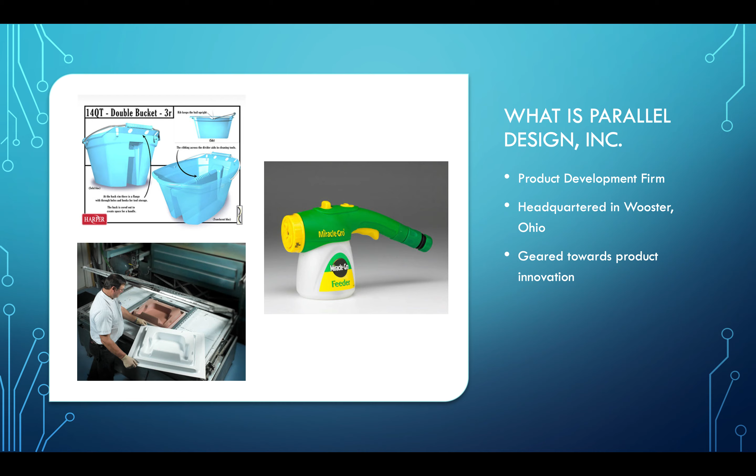On Parallel's website, they list all the different services they provide. The first one that comes up is website programming. They program for many different things that a company's website could need, as well as application-based code, such as programming for machines that do certain tasks, such as packaging the pills that a hospital would use.

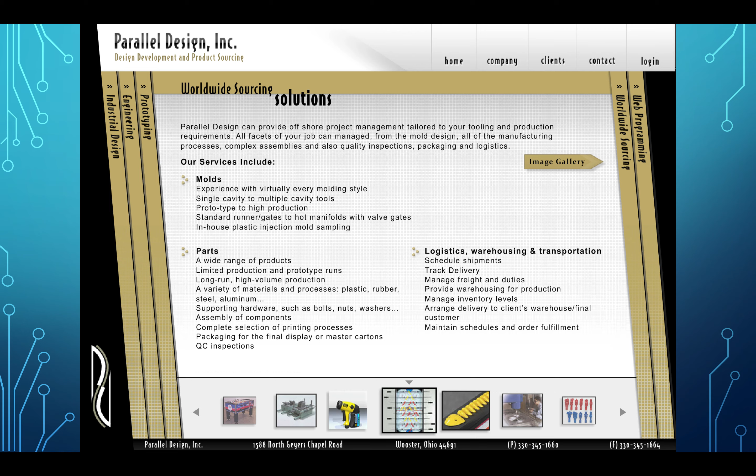The next service they offer is logistics planning of delivering and making products, as well as multiple solutions for sourcing them. Another is the prototyping of products. This is kind of what I dealt with, as some prototypes are made out of plastic and have to be screwed together, but I'll get into that later. They offer designing and prototyping of any new products a company wants to make.

The second to last service on their website is the engineering of products. A company would need this once they have a product they want to produce, but need to refine it for mass production. This is the area where my practicum fell the most. They analyze products to figure out what could go wrong with them and how to fix those issues.

The last service they offer is innovative industrial design. They look at products and how a company wants to change them to figure out how they can make those changes. This helps companies address what the product needs to do or change things that don't work.

So what was my practicum? I looked at the joints where screws are put into plastic products. This requires a boss, which is a piece of the product where there is more plastic for the screw to thread into, and it makes it harder to break the piece off. But even with the more reinforced plastic, the piece can still break, which is what I looked at specifically.

The two ways the piece can break are either by pulling the screw out of the plastic and breaking all the threads in it, or breaking the boss off entirely, screw and all. Knowing the forces where the two types of compromises happen is how the designers figure out how small the boss can be. It all depends on the outer diameter of the boss.

The more plastic that's there, the stronger it'll be. So as the size of the boss increases, it becomes less likely that the entire boss will break and more likely that the force will pull the screw out.

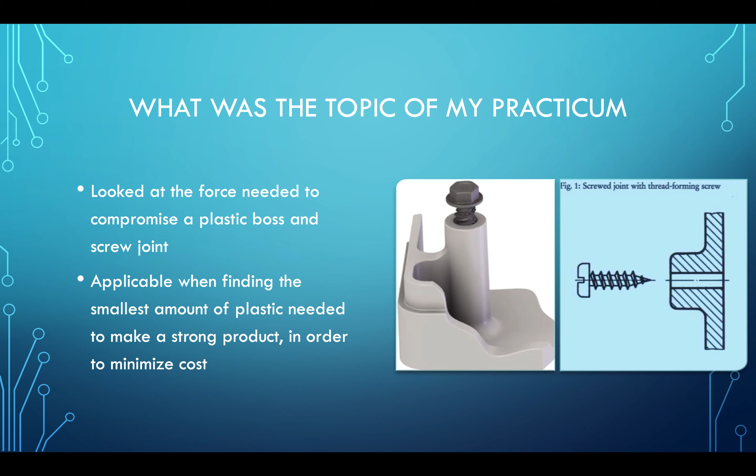To start out the practicum, my supervisor gave me a packet with general information about screw joints and how they can break. This had everything from thread-forming screws to sheet metal screws to application problems and how to find the forces that'll break them. This gave me a lot of information, but I still had to do a good amount of other research on the forces that break plastic products and everything involved.

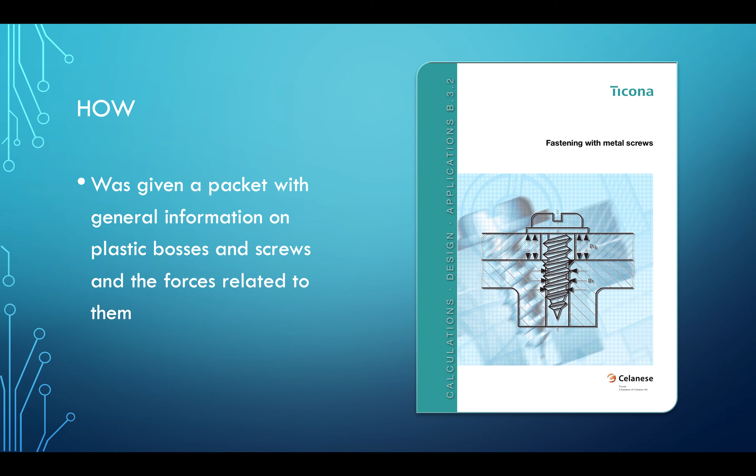Once I figured out what the information in the packet was actually saying and understood the concepts, I was able to look more closely at the other parts of the packet that actually had the information I needed for what I was doing. The first part of the packet that applied to the specific situation I was looking at was this table and diagram. The packet overall had a lot of recommendations for how to go about making plastic screw bosses and the dimensions of everything involved.

For the thread-forming screws I was looking at, they recommended that the diameter of the screw receiving hole in the boss be 80% of the diameter of the screw, including the threads. This makes it so the screw has enough plastic to bite into, but so that there is also enough room for the screw to go in without cracking the plastic anywhere. This gave me the inner boss diameter based on the screw size, as it should be 80%.

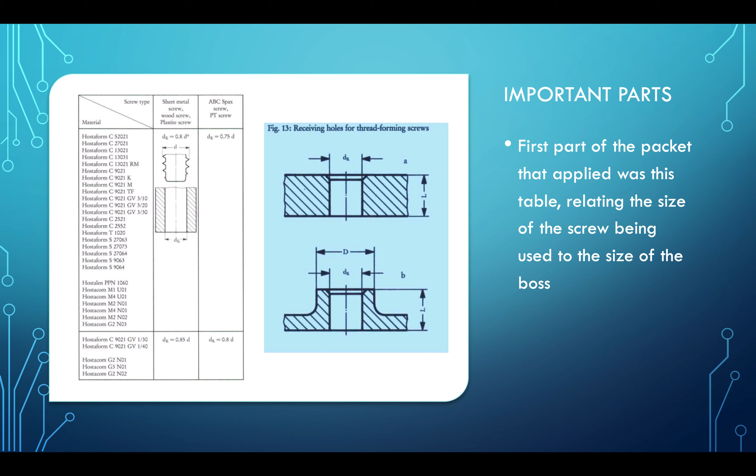From there, I went to the next part of the packet, which gave formulas for the shear and break forces based on the absolute forces. This was definitely the most useful part of the packet, as it gave the formulas and the characteristic values of a bunch of different plastics, which will be used later.

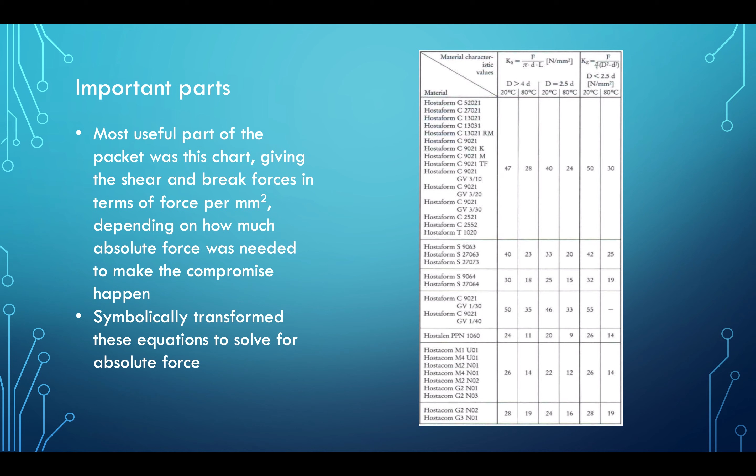Since I was trying to compare the absolute forces needed to compromise the boss, I needed to solve the equations for absolute force. Doing this meant that the material characteristic values were inputs of the equations, which is shown in the formulas I derived in the spreadsheet I made. Moving into the products of the practicum, it's all based around these formulas.

F equals Ks, which is the shear force, times pi, times the inner diameter of the boss, times the length of the screw, is the equation for the force to shear the threads. The force to break the boss is pi over 4 times Kz, which is the break force of the specific plastic they're looking at, times the outer diameter squared minus the inner diameter squared.

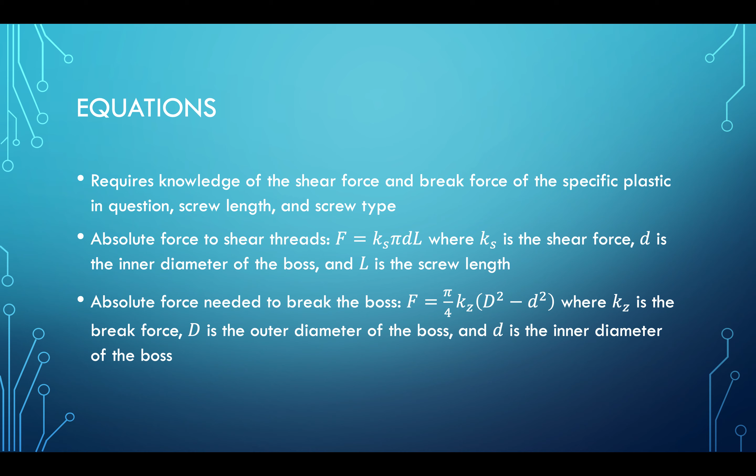So using these equations, I moved on to the final product of my practicum, which was the spreadsheet. Using the spreadsheet, a designer can input the necessary things and get back information about how small the boss can be to optimize performance and cost.

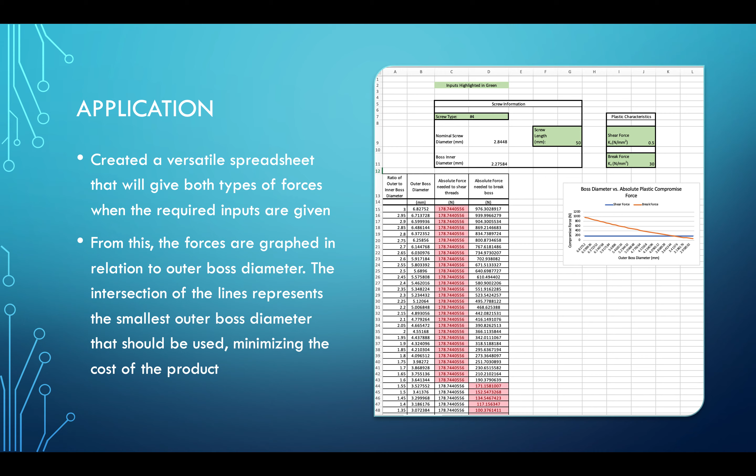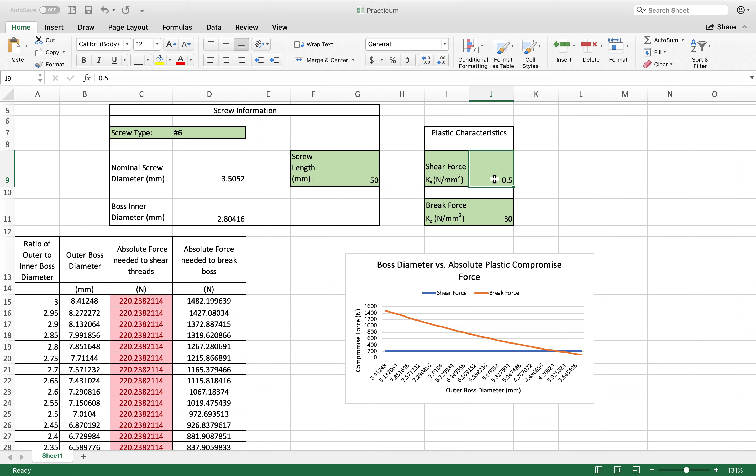So looking at the spreadsheet, we see that the required inputs are the screw type, which you simply select from a drop-down menu. This determines what the nominal screw diameter is, because that is just a size that comes from the screw size, as well as what the inner diameter of the boss should be, because that's based on the screw size. You also input the length of the screw and the two characteristic values of the specific plastic you're working with. Once all these are put in, we see that it generates a table with the absolute force needed for the two different compromise types, based on the outer diameter of the boss.

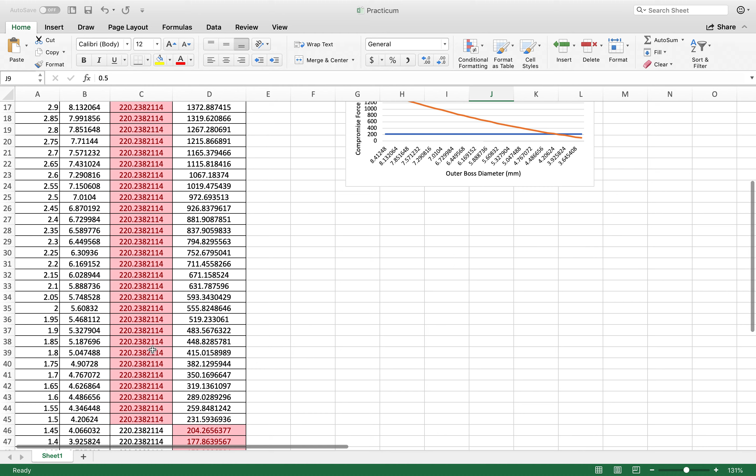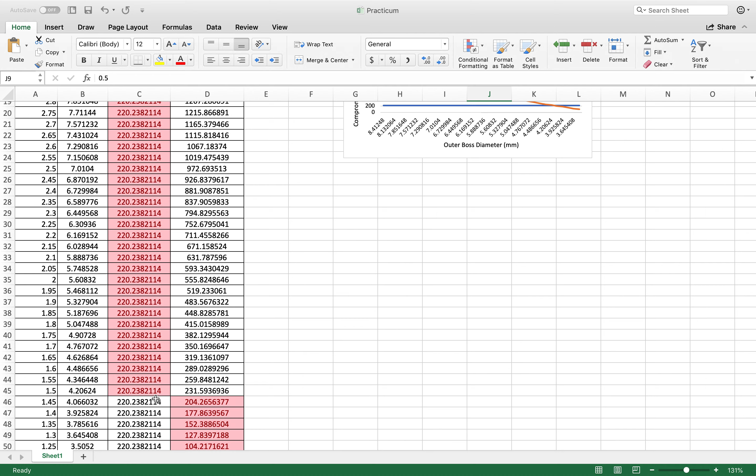The values highlighted in red are the forces required for the compromise that's going to happen. Which compromise happens depends on which one of the forces is less. So the one that requires less force is the one that's going to be highlighted. Where the highlighting switches is the smallest outer boss diameter that should be used, which makes a lot more sense if we look at it graphically.

In the graph, we see that the shear force doesn't change depending on the boss's outer diameter. For this particular situation, it's about 220 newtons. So, once the outer diameter reaches a certain value, it can't be made any stronger by making it any bigger. The shear force is always going to be the same. But once the outer boss diameter drops below a certain amount, the force to break the boss becomes less. So that's what's going to happen.

So this intersection point is the strongest the boss can get, because if the boss gets any bigger, the compromise that's going to happen is just the shear force, which stays the same no matter how big the boss gets. By finding the intersection of these two lines, a designer can figure out how small the outer boss diameter can be for the certain situation in order to maximize the strength, and this helps them to minimize the cost.

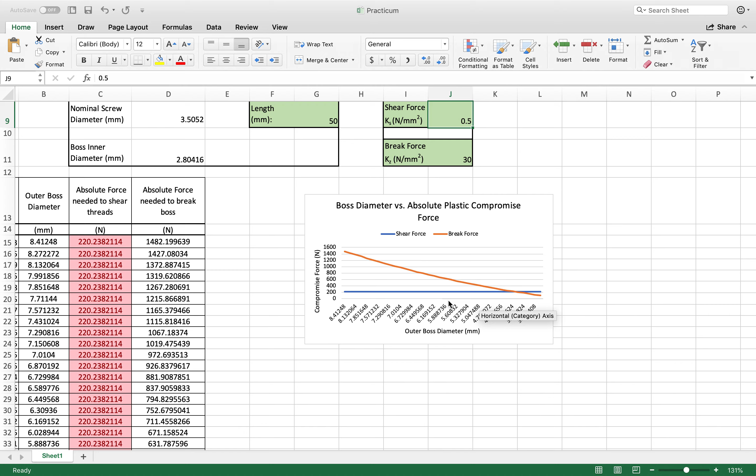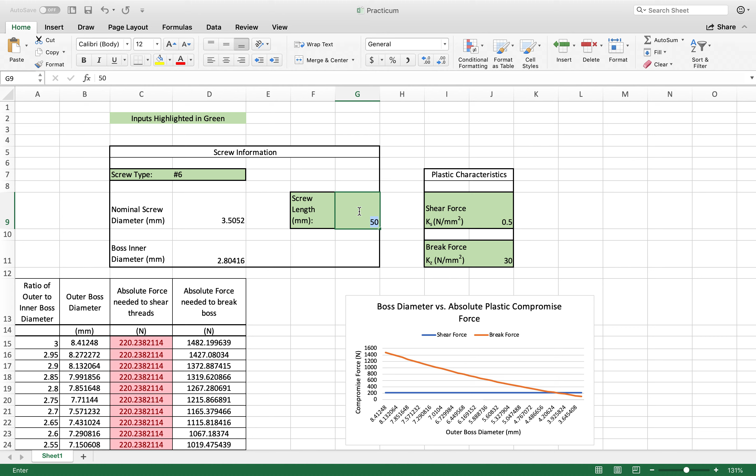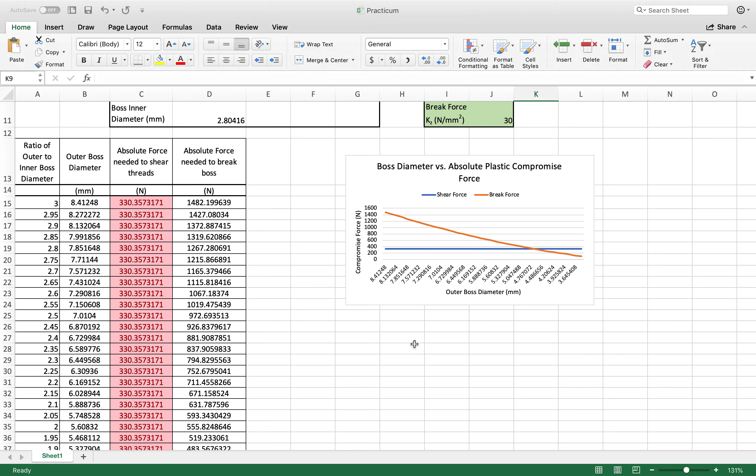As we can see, we can change all of these different values. We can pick from this list of screws, which is the sheet metal screws that Parallel uses, and we can input different screw lengths, and it'll give us all the different outer boss diameters that should be used, and they can easily find how small the boss should be. So as mentioned, the benefits to the company is that they can find the outer boss diameter and the overall boss size that maximizes the strength of the boss while minimizing the cost.

So moving into what I learned from the practicum, I was exposed to using math in a business setting. A business such as Parallel is concerned with designing products that work well and cost as little as possible. They want to find the best ratio between these two things, as with most businesses that have any kind of product. It isn't cost effective to test a bunch of models to figure this out, so they need to figure it out mathematically and be able to justify it.

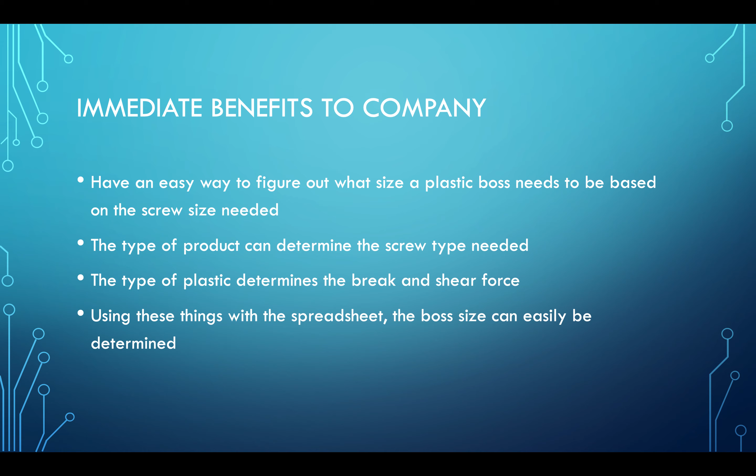I also gained experiences from my practicum that apply to my life now and in the future. Right now, I can take the things I learned in my content classes and apply them to a setting such as this. I was exposed to design and money context, so there's a lot of concepts I can apply this to. I also learned a good amount about basic physics, which is a subject I've never taken, and learned a lot of new things about the program Excel.

The biggest benefit I can see for my future career is being able to answer my students when they ask when they will actually use what they're learning. I can talk about this experience directly, or if I apply what I learn in my content classes to this context, as I mentioned earlier, then I can tell them about those things too.

Working with both product design and money and cost has shown me a lot about how much math is used in the real world. I can also use this experience to come up with real-world problems to give my students. This will help to keep them from asking when they'll actually use this in real life, as they'll be using it in a real-life context.

A possible problem I could give them is having them do a simpler version of what I did. I would give them the equations I found and have them consider just one type of plastic and screw size, so it's not as robust as what I've done. So the only variable they're working with is the outer diameter of the boss. I would ask them what the size of the boss should be to use the least amount of plastic.